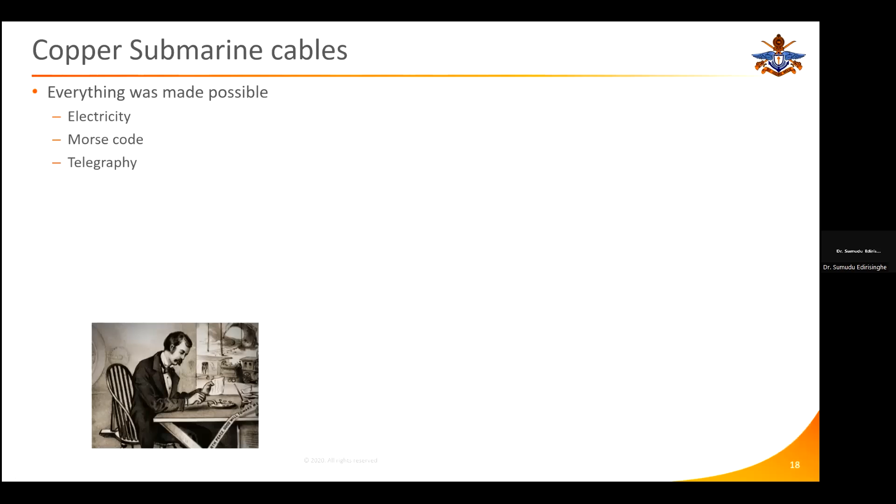One of them was electricity, and also at the same time, the invention of Morse code, and then driven through that, telegraphy. So those three main events happened in the 1800s that made a big jump or made a big push for the next chapter of telecommunications.

And by that time, another thing has happened in the world. Most people have taken to ships and started discovering various continents and countries around the world. So because of these two things, mankind was spread around the globe, and they wanted to get information from one place to another place that required crossing the sea in one way or another.

And of course, at that time, people haven't invented the aeroplane. So any message that needs to be sent from one continent to another continent had to happen through a ship. So a ship would take between 6 to 8 weeks to go from UK to USA and vice versa. So a message would take at least 3 to 6 weeks from one place to another place, depending on the sea conditions, the winds, and so on.

So once we have invented electricity and Morse code, there was a significant drive to have some kind of electrical cable to communicate between countries that are separated by sea. So this idea was floated very early in the 1800s, and by 1851, the first submarine cable was initiated, and that was laid between UK and France, which is only about 20-30 kilometers.

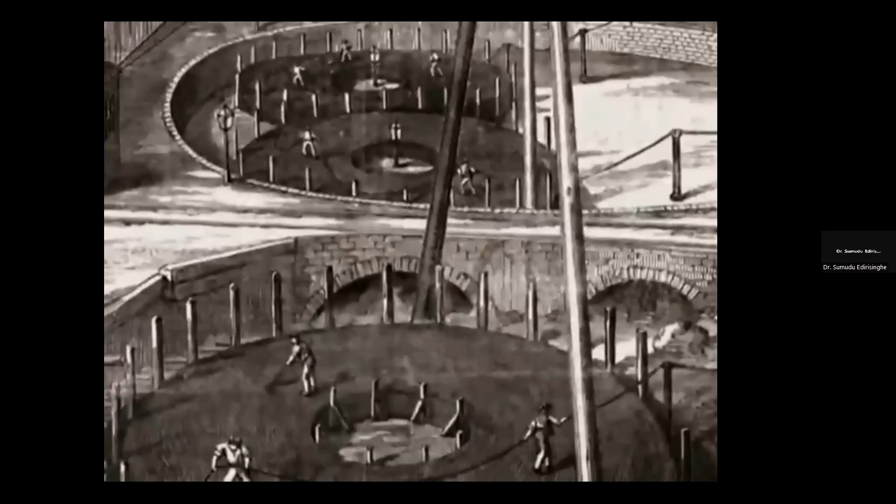By the 1840s, a network of telegraph poles connected nearly every American city. And by 1861, a telegraph line reached from New York to San Francisco. But messages between America and Europe still had to be sent the old-fashioned way, on sailing ships that could take weeks to cross the Atlantic Ocean. And the idea occurred to somebody to build a telegraph line across the Atlantic Ocean. The transatlantic cable would be the greatest engineering feat of the 19th century, but the idea for it came from an unlikely source. Cyrus Field, a savvy New York businessman looking for something to do. He knew nothing. He was in the paper business. He knew nothing about telegraphy. But he suddenly had this idea we could put a line across the Atlantic Ocean, which is about 100 times longer than the undersea cable in the world at that time. He was a very determined man. He was not easily discouraged. Field spent 12 years raising money for the project, crossing the Atlantic more than 30 times to seek investors in England and Europe. He was the right man for what would prove to be a daunting task. First, over 2,000 nautical miles of cable had to be built. The cable consisted of 7 strands of copper wire insulated in gutta-percha, and it weighed over 1 ton per mile. Then, the cable would have to be unspooled yard by yard across the Atlantic Ocean, from Ireland to Newfoundland in Canada. But at the time, there was no ship in the world that could carry the heavy load of insulated copper wire. So 2 Navy ships, one American, one British, would each carry half of the cable.

The ships set off together from Ireland on August 5, 1857. But disaster struck 6 days later as the American ship was hit by a wave and the cable snapped. There wasn't enough cable to continue, so the project had to wait another year.

For the second attempt, new cable was manufactured, and it was decided that the 2 ships would meet in the middle of the ocean, splice their 2 halves of the cable together, and then go off in opposite directions, laying cable as they went. This time, the cable on the British ship snapped, and the mission had to be abandoned once again.

On the third try, both ships reached their destinations on opposite sides of the ocean with the cable intact. On August 16, 1858, Queen Victoria sent a telegram of congratulation to President Buchanan through the line. But a few weeks later, the signal on the cable gave out. Still, Cyrus Field would not give up.

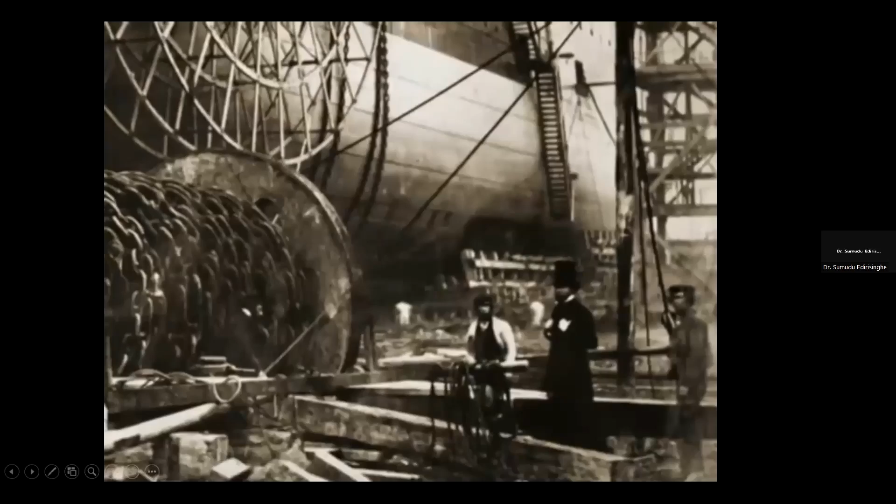It took them 5 tries. He first had the idea in 1854. It was 1866 before they succeeded. The Civil War came and went, and Field worked even harder, raising more money for a new, heavier, and better insulated cable. By July of 1865, there was finally one single ship that could carry it, the largest ship in the world, the Great Eastern.

But again, 600 miles from Newfoundland, the cable snapped while being repaired. Sailors spent nearly 2 weeks fishing for the cable that had sunk, but finally they had to give up. Still, Cyrus Field knew his new cable would hold out if they tried it one more time. A year later, the Great Eastern successfully laid it across the ocean.

So you can see how many times people attempted to make this journey. And the first cable that was laid in the 1850s, it said after the first message was sent from Queen Victoria to President Buchanan, the signal deteriorated. So what happened really was that first message took something like 20 hours to transmit, because they would transmit a symbol and it would get it wrong, and they might have to transmit it several times until it was correctly decoded at the far end.

So in order to improve this, the engineers thought the best way to improve the signal is by increasing the power of the signal, because this is how radio signals work, right? If you want to send a signal further, you transmit with a higher power in the transmitter. Unfortunately, cables don't work in the same way. So as soon as they increased the electricity, it burned the cable out and completely snapped it. So it completely destroyed the cable by trying to increase the signal power in this first submarine transatlantic cable.

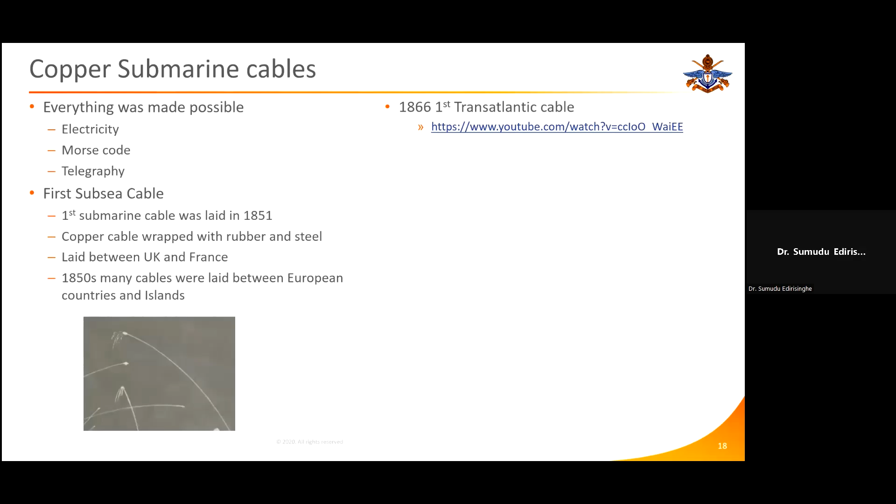But after these failed attempts, many tries later, they managed to eventually have a cable laid by 1866 with the use of the Great Eastern ship that was built by Isambard Kingdom Brunel. So by 1871, the use of undersea cables had spread from that transatlantic route to between Japan, Russia, China, Europe, and the Indian Ocean. So many countries were slowly getting connected using undersea cables.

And the first cable that actually carried a real live telephone call was made in 1891. Because remember, telephones were only invented around 1876 by Alexander Graham Bell. But until then, all they were doing with these cables laid under the sea was to send Morse code signals like a telegraph. So it would only be a short message sent from one end to the other end. So it took a long time, about 15 years since the invention of telephones, to be able to carry a telephone call on a cable that was laid under the sea.

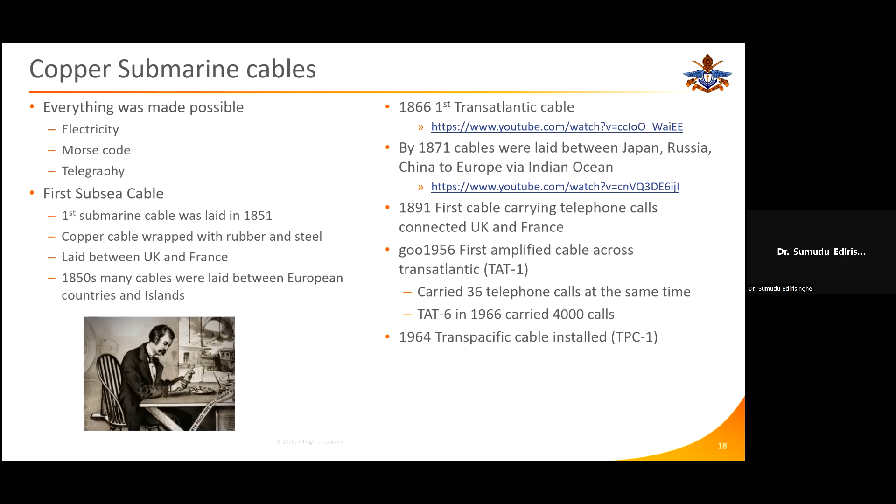So what are the main components of a submarine cable system? Submarine cable systems consist of some terminal equipment, which will be the equipment that converts your telephone calls into a series of zeros and ones. And we are talking about fiber optics. So those zeros and ones need to be converted to optical pulses, depending on whether it's a 0 or 1.

Then there is a cable that carries that information under the sea, which is a submarine cable. And sometimes these cables not only go to one country, they actually serve several countries. And increasingly, the new cables that are designed today, a single cable will connect probably 20, 30 countries at the same time. In the olden days, when we designed a submarine cable, it went from one point to another point. They were called point-to-point links. They were only predominantly connecting two countries together. So nowadays, we are connecting multiple countries together.

In addition to that, we also have amplifiers to amplify the signal under the sea. These cables, depending on the location where you're going to lay the cable, have different amounts of protection around them. And then all this network, including the units under the sea, has to be managed. Somebody has to stay there 24/7 to look after the health and react to any problems at any given time.

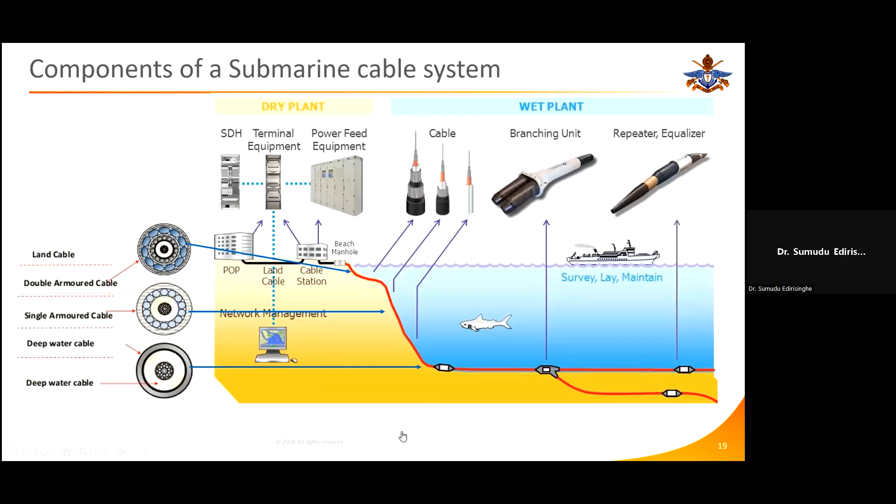So a submarine cable is usually made out of a few optical fibers. And optical fibers are the size of a hair. These optical fibers, usually on a submarine cable, we only have about 8 pairs. So that means 16 fibers.

One fiber will take data from A to B, and the other fiber will take from B to A. So to connect two countries, you always have to have two fibers. One doing transmission in one direction, the other one doing the transmission in the other direction. So optical fiber always comes in pairs, or two fibers together.

So the optical fibers are then set in a little petroleum jelly. It's like the jelly you make at home, but it's made out of petrol, so they don't freeze up in the cold weather. And that gives a little bit of a cushion for the optical fibers to sit in without getting damaged. Around that, we have a copper tube.

And that copper tube provides two activities for the cable. One of them is to protect the fragile fiber that is inside. Secondly, this copper tube carries the electricity that is required to power up the amplifiers that are under the sea. And beyond that, there is a polycarbonate structure and an aluminium water barrier. So this aluminium stops any water getting inside this cable.

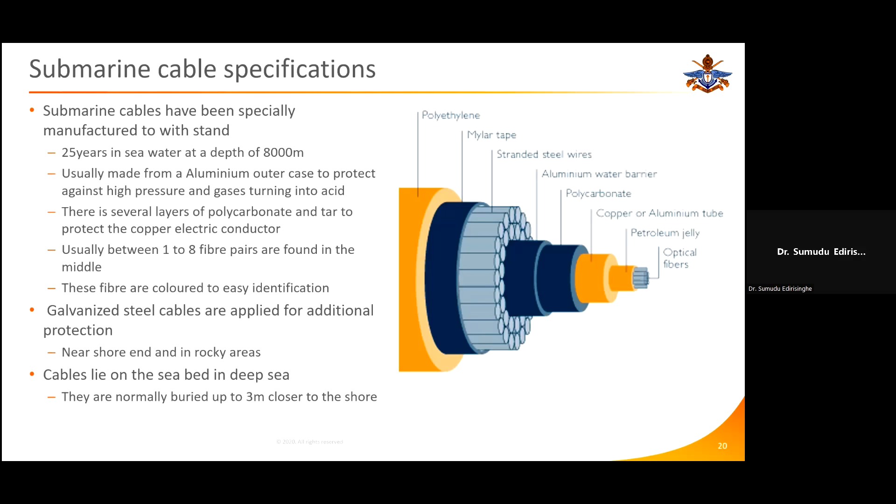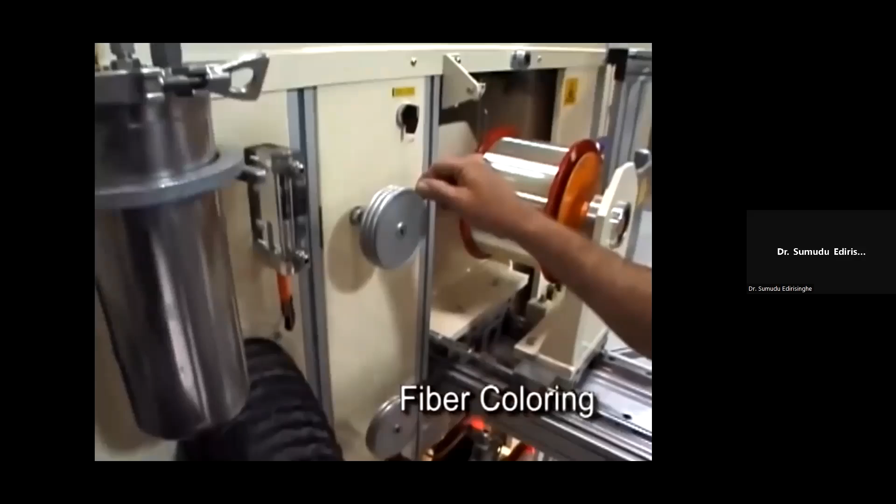In the UV inking process, a specialized ink is coated onto each optical fiber. One of 12 colors is used to properly identify the optical fiber within the tube or ribbon in accordance with industry standards. After the inking step, the optical fiber quickly passes to a curing enclosure that rapidly cures the ink to form a permanent color coating and then wound onto a take-up reel. The color-coated fiber is now ready to be put into loose tube or made into ribbon fiber.

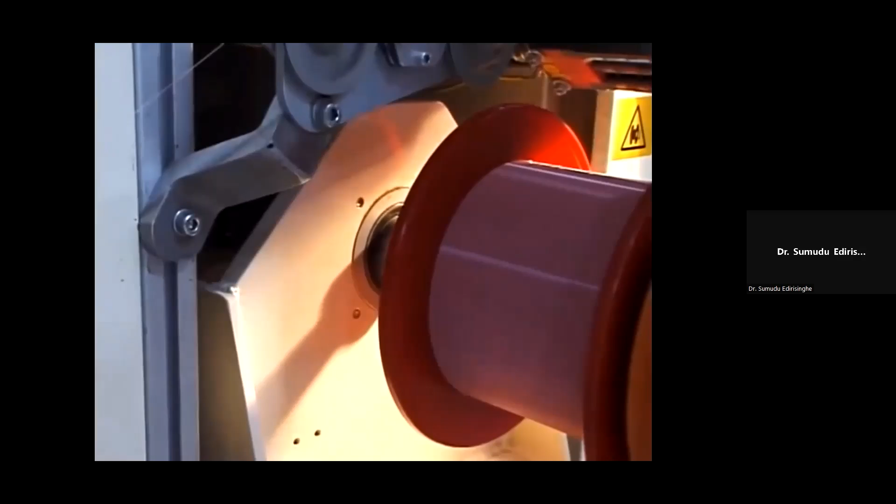For tight buffer cable products, a colored PVC coating is applied that increases the diameter of the fiber from 250 microns to 900 microns. This process is called tight buffering, which, in addition to providing a color to identify each fiber, allows the resulting cable to be flexible, yet rugged and easily mated to mechanical connectors. For these reasons, the tight buffered cable design is the preferred fiber cable design for indoor cable applications.

At this point, fibers destined for loose tube or tight buffered cable proceed to the sheathing or tubing process. Fibers destined for ribbon fiber cables must undergo an additional intermediate step called ribbonizing. Fiber ribbons are created by serving 12, 24, or 36 individual fibers side by side into a coating die that encapsulates the fibers with a UV curable matrix material into a fiber array. In a process similar to the inking process, the ribbon leaves the coating die and passes through an intense ultraviolet light source that cures the matrix and solidifies the ribbon. The completed fiber ribbon is then wound onto a supply reel.

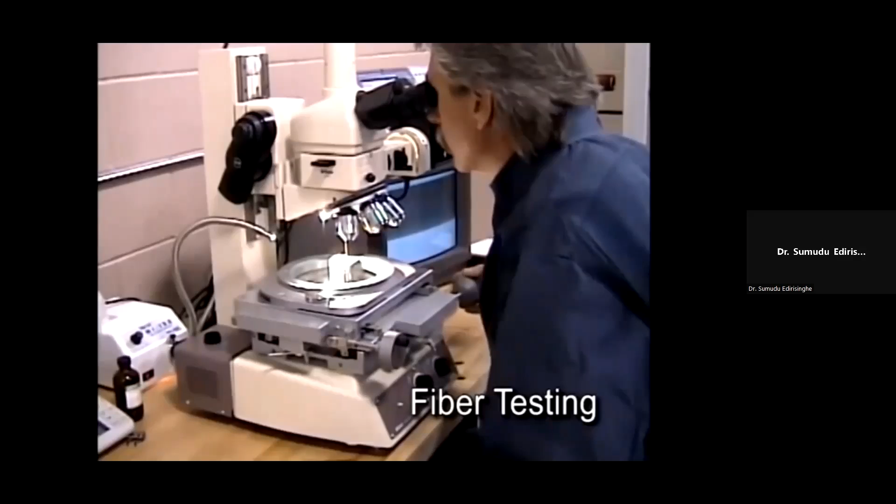Before the ribbon can be used in any cable, however, it must be tested to verify that its structure and dimensions meet specifications. A small length of ribbon is cut from the reel and placed under a microscope. A technician carefully examines the ribbon sample and fully documents the results. Only if the sample passes inspection can the reel go on to be used in a fiber optic cable. All three of the basic fiber cable designs, loose tube, ribbon fiber, and tight buffered cables, require some form of sheathing process. This is usually another intermediate step, but can be the final production step for small premises cable designs.

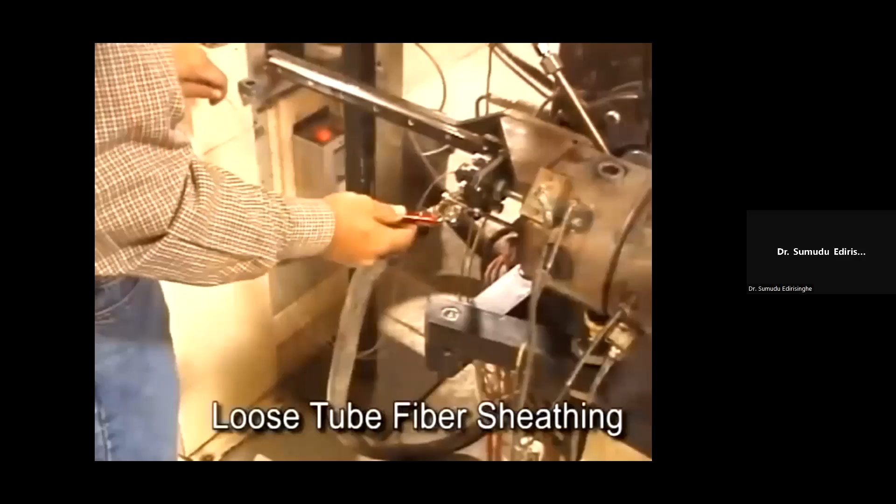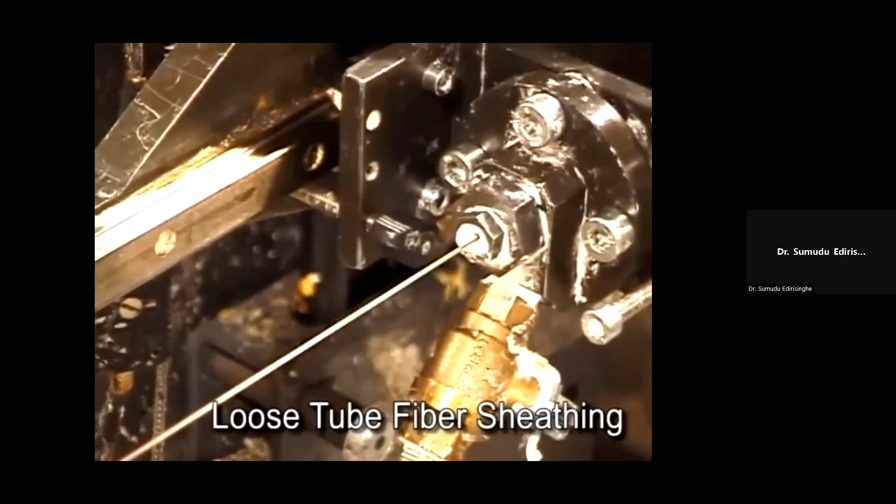Here we see a sheathing process for OSP fiber cable that begins with a number of reels of color-coded fiber loaded onto a machine that supplies each fiber at a constant rate under computer-controlled tension. The fibers come together and are fed into an extruder head that performs two main functions. First, a flow of moisture-blocking gel surrounds the fibers. Then, molten colored plastic is extruded around the fiber bundle to form a loose tube around the fibers. Immediately upon leaving the extruder, the hot, soft tube is passed through a long water-filled trough that slowly cools and hardens the tube. The completed tube is passed through an optical micrometer to verify its diameter is within specifications. It is then wound on a take-up reel to be used later in the cabling process.

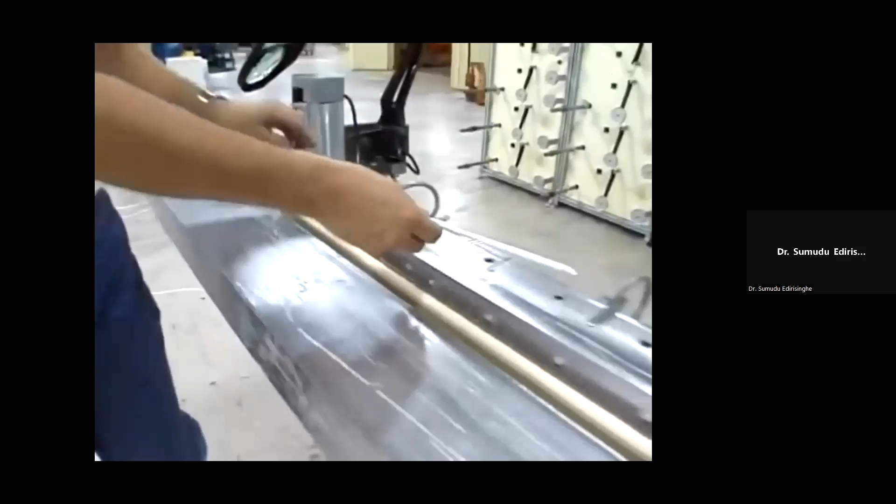As part of our quality control process, we periodically test fiber tubes to verify that there is sufficient slack fiber within the tubes. This additional fiber slack, also called excess fiber length, or EFL, allows the cable to expand and contract around the fibers without causing stress or attenuation problems. To perform this test, a section of a tube is placed on a special test fixture that accurately cuts it to a predetermined length. The tube is opened midway along its length and the fibers are removed. One of the fibers is separated from the bundle and is mounted between a pair of measurement blocks. A micrometer wheel is carefully adjusted to just bring the fiber into tension. A digital readout displays the fiber length, which is then compared to the known length of the tube.

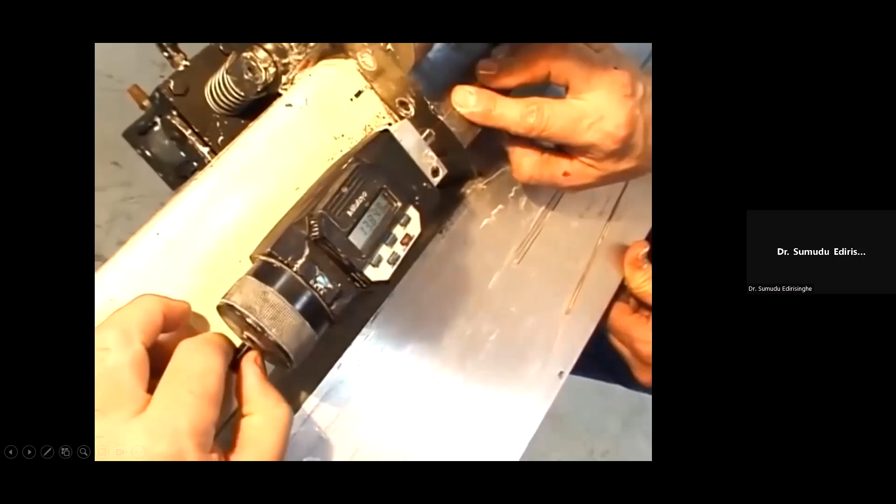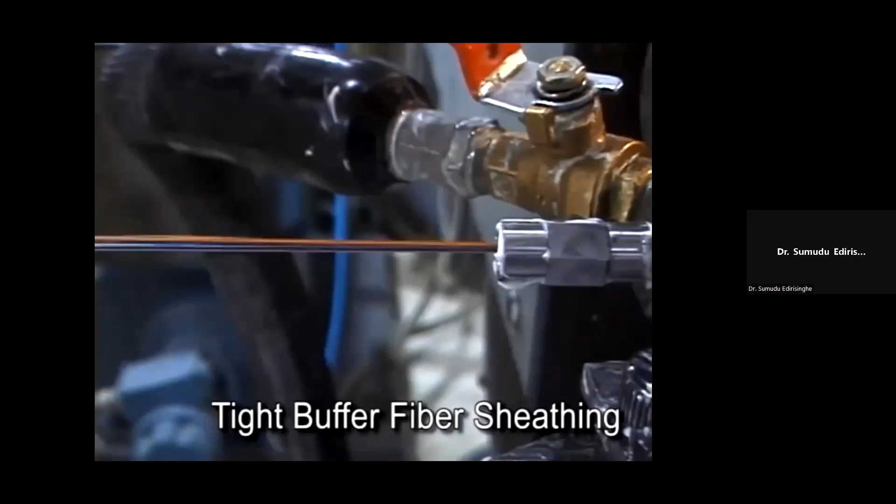In a different sheathing process, we see tight buffered fibers being fed into an extruder head along with special strength yarns. A fire retardant plastic material is extruded to form the protective tube around the fibers. In this case, the tube is also the outside protective jacket for the now completed cable. Ribbon fibers are handled in a similar manner during the sheathing process. 1 to 30 ribbons are oscillated in one direction prior to being fed into an extruder head, which forms the tube. This oscillation allows for a predetermined amount of fiber slack to be maintained within the tube.

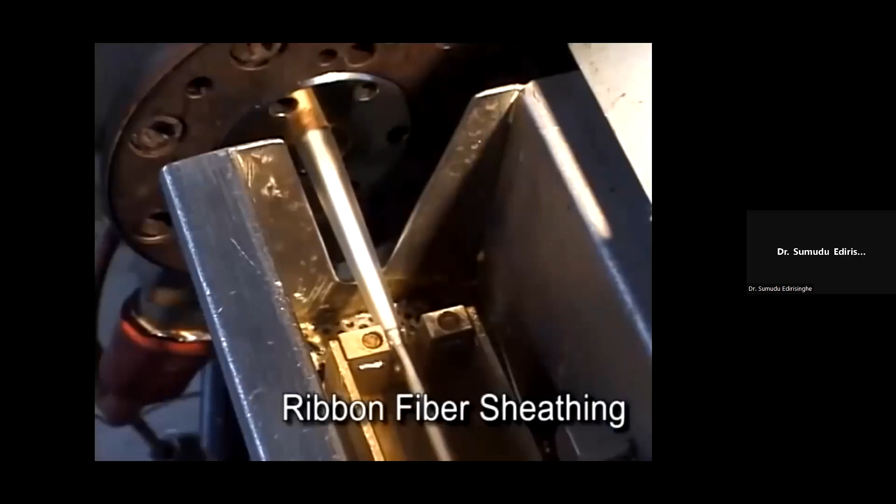PFM gel or dry water blocking agents are also inserted prior to the tube being formed around the ribbons. Depending on the number of fibers required, multiple tubes of fibers may be needed to create the desired cable. The process of combining multiple tubes is called stranding. Reels of fiber-filled tubes are loaded on the payoff equipment of the cabling line. In this example, we see the production of a loose tube stranded cable.

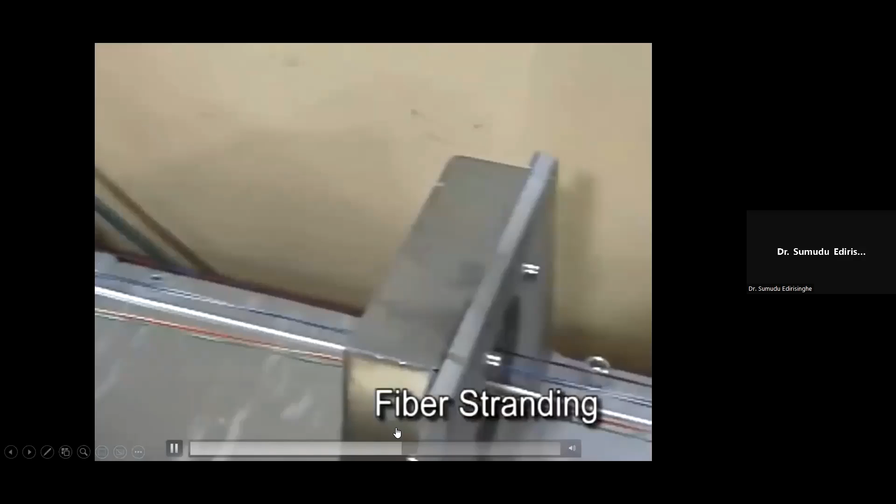The process begins with a reel of fiberglass rod that will become the cable's central strength member. Along with the fiberglass rod, a number of reels of colored loose tubes containing fibers are fed through a series of rollers and guides that straighten the tubes and position them in the correct relationship for the next step in the process. The strength member and tubes then pass into a machine that winds the tubes in a reverse oscillating wrap around the central strength member. Here, you can easily see how the wrap periodically reverses.

The cable is then covered with a layer of moisture-absorbing tape. This unjacketed cable subassembly can be used later as the inner layer of a multi-layer stranded cable, or be surrounded with steel armor for use in an underground cable, or simply be covered with an outer jacket for general-purpose applications. The final phase of fiber cable production is the jacketing process. The materials used for the outer cable jacket are chosen for the intended application of the fiber cable.

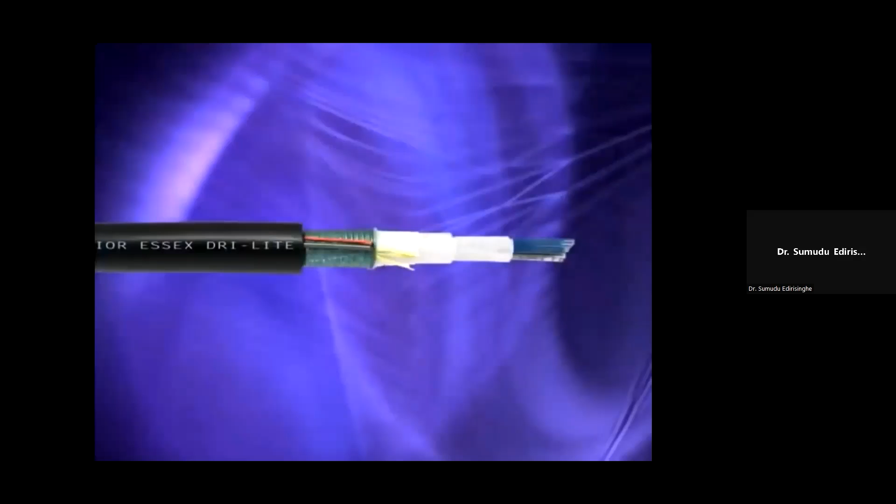For most OSP fiber cables, Superior Essex utilizes medium-density polyethylene due to its durability, moisture resistance, and low coefficient of friction. High or low-density polyethylene can also be used for select OSP cable designs that require different performance characteristics. Polyvinyl chloride, or PVC, is typically used for the jacket material in our premises cable designs. PVC is a thermoplastic with good flame and abrasion resistance, making it suitable for raceways, indoor-outdoor cable structures, ducted environments, and most riser-rated and plenum-rated locations.

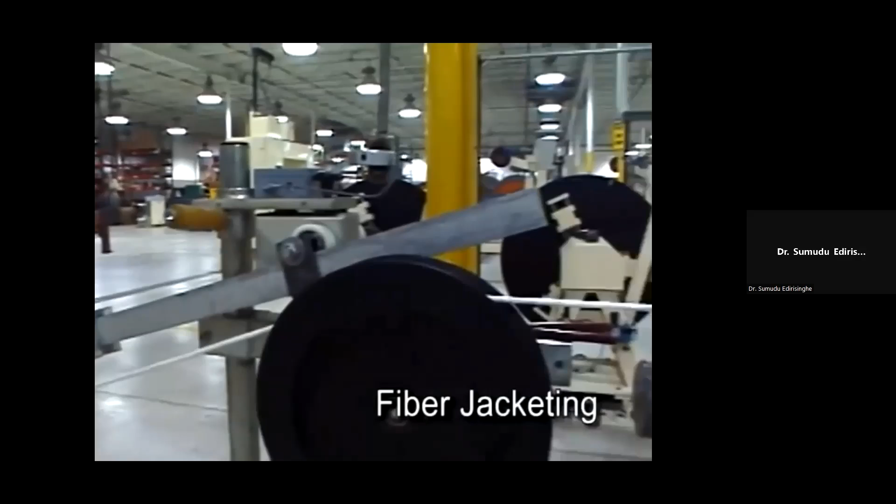The jacketing line begins with the reel of partially completed cable we saw manufactured earlier. This cable passes into a machine that spins a series of flexible fiberglass strength members in a web-like configuration around the cable. The web-like design avoids torque problems, which would cause the cable to have a preferential bend. In order to make it easier to access the cable core where the tubes and fibers are located, one or more high-strength ripcords are added. Here, the red ripcord is seen traveling parallel to the cable as it moves toward the jacket extruder.

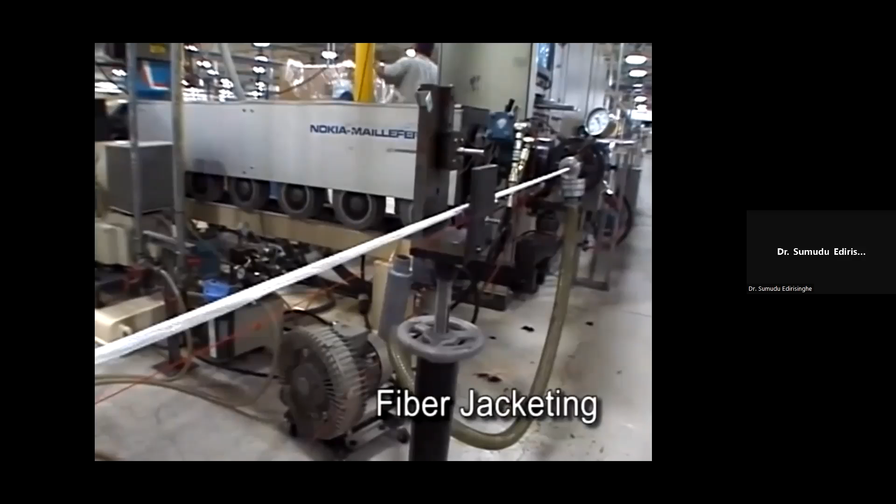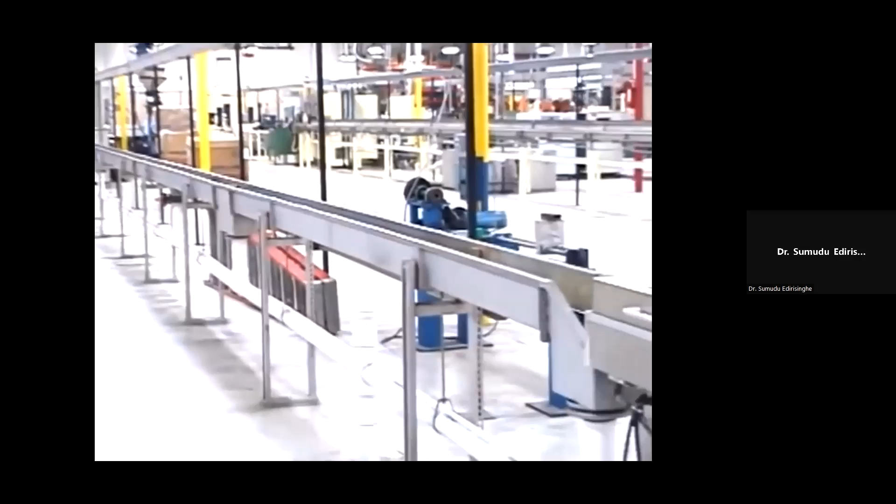The jacket extruder is simply a scaled-up version of the tube extruders we saw earlier. Molten jacket material is injected at high pressure and formed around the moving cable. When the cable leaves the extruder, it is very hot and quite soft, so it must pass through a long cooling bath while being kept straight to prevent the cable from developing a permanent curl. When the cable exits the cooling bath, it is passed through an optical micrometer to verify that its diameter is within specifications.

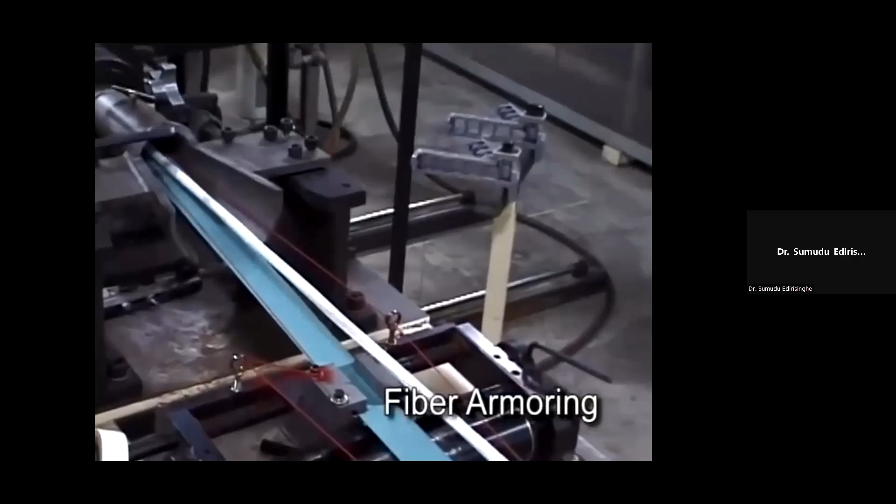Cables used in direct buried applications often require corrugated steel armoring to prevent rodent attack as well as damage from sharp rocks. The corrugated steel armor is formed from flat steel tape that is supplied on large reels. The cable, armor, and a ripcord are fed through a forming tool that wraps the armor around the internal cable elements. The newly armored cable now passes through an extruder where the outer jacket is applied to the cable.

After jacket extrusion and cooling, the cable passes to the jacket printer. Here, a hot foil printing process transfers white ink into permanently indented print, which includes cable type, fiber count, date of production, footage or meter markings, and other required information. The completed cable is then wound onto large reels for shipment to the customer. However, one critical step still remains.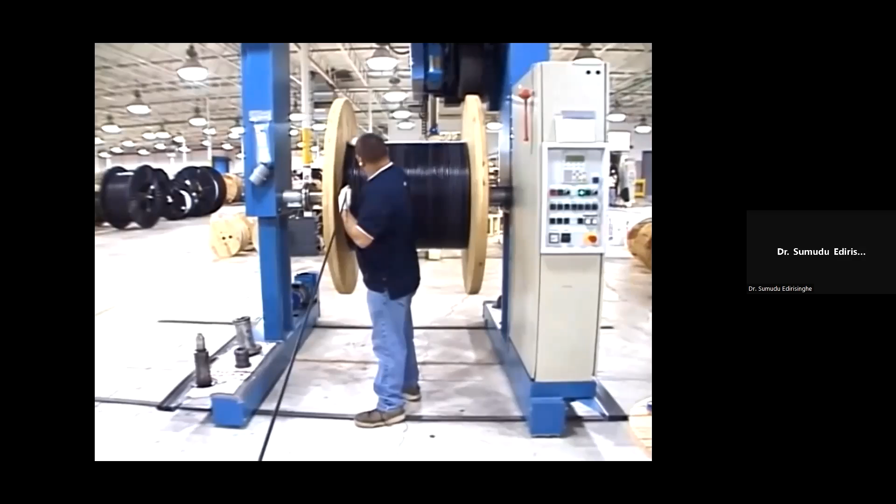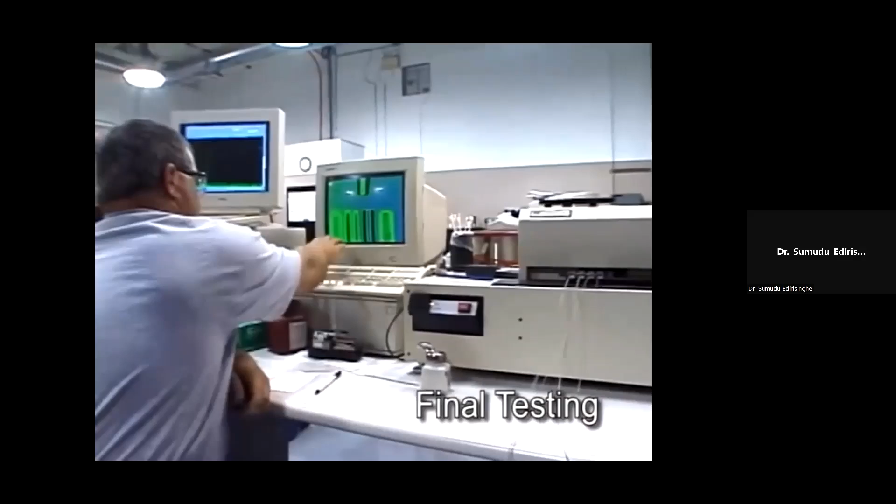The cable must go through our final test process to ensure that all fibers meet optical specifications established by Superior Essex. A short length of cable is prepared to expose the fibers to be tested. In this example, the technician is testing a ribbon fiber cable. All of the ribbons within the cable are prepared and inserted in test fixtures that are sequentially plugged into an automated test station. In this way, each fiber and every ribbon of the cable is quickly tested and compared against our specifications. Once the cable passes all tests, the cable...

Okay, I'm sorry that video has been pretty long, but you can see the various stages that have taken a few pieces of fiber optic cable, which are the size of your hair, into a cable that is going to sit under the sea for 25 years. One of the things I wanted to highlight was when they were winding the fiber, you could see them spinning the winding structure in one way for a few seconds and then in the reverse direction for a few seconds.

So by doing so, they can accommodate any expansions and compressions of the fiber cable due to heat. So some of these fiber will be sitting under the sea, which is normally a constant temperature at about 4 degrees centigrade. But the parts that are sticking out into the beach could go through different temperatures in different parts of the world and at different times of the year.

So if, for some reason, this is a cable used in the Middle East, during the summer in the Middle East it could be up to 50 degrees centigrade. Whereas in the winter, in some places like Siberia or Canada, it could be about minus 40 degrees centigrade. So depending on the temperature that the cable is going to suffer, the fiber optics and whatever's inside the cable can expand or contract. And this could create tension and break the fiber.

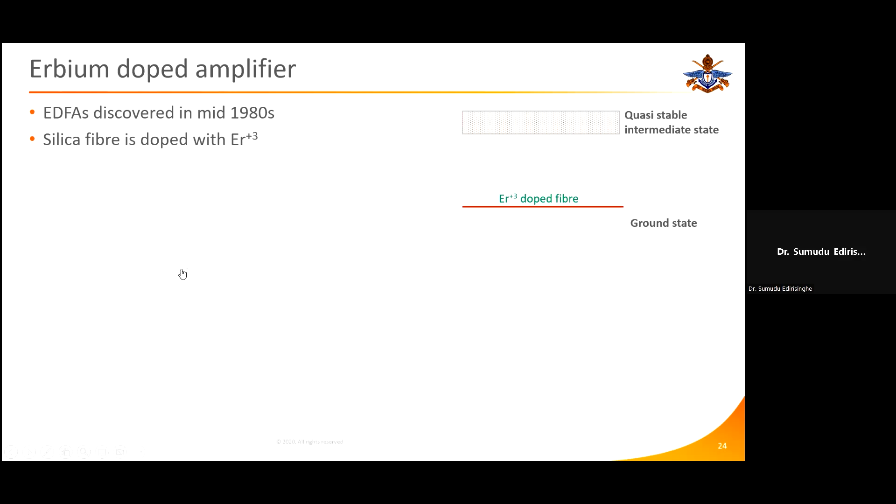So what they discovered was, if you take a piece of silicon dioxide fiber, I mean, fiber is made out of silica. If you take one of those silica fibers and put some erbium atoms inside this silica... In a school cricket match, right? All these people from either Ananda or Nalanda, whichever school you go to, watch the match. And after some time, you will meet your friends, have some alcohol, and you get into this quasi-excited state. So alcohol is like the 1480 nanometer light.

All these people who went to watch the match are these electrons that are staying in the ground state. Now, by lunchtime, because they have had a few drinks, they are all very excited. And what happens? A girlfriend from the rival school will walk across your tent or the boys' stand. You guys get excited and you start shouting at her or saying bad things. And she gets very excited. She goes and tells her friends, and this ends up in some kind of a row.

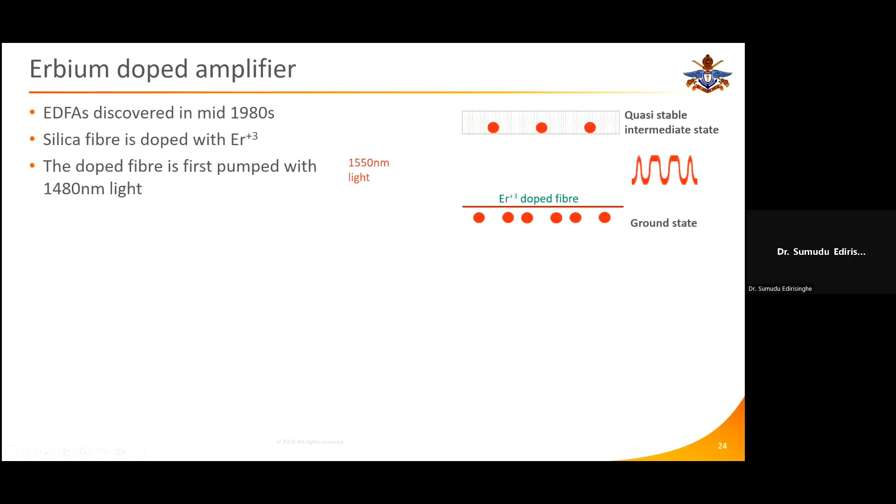So a very similar thing happens with electrons inside an erbium doped fiber. Once they get the energy from the 1480 nanometer light, they go to this excited state. As soon as 1550 nanometer light, which we send our data information through, passes, the energy starts transferring from these high energy electrons towards this light. The energy that is dropped when going from a high energy state to a low energy state is emitted as light or photons, and that is collected by this 1550 light to energize and amplify itself.

So this principle can also be created by using one of these structures. We use a small piece of erbium. We have a permanent laser energizing that erbium. And when 1.55 micron light goes through on one side, it gets amplified and comes out on the other side. Obviously, we need to do some filtering and get rid of unwanted noise, so we can have a very uniform gain across a wide range of frequencies.

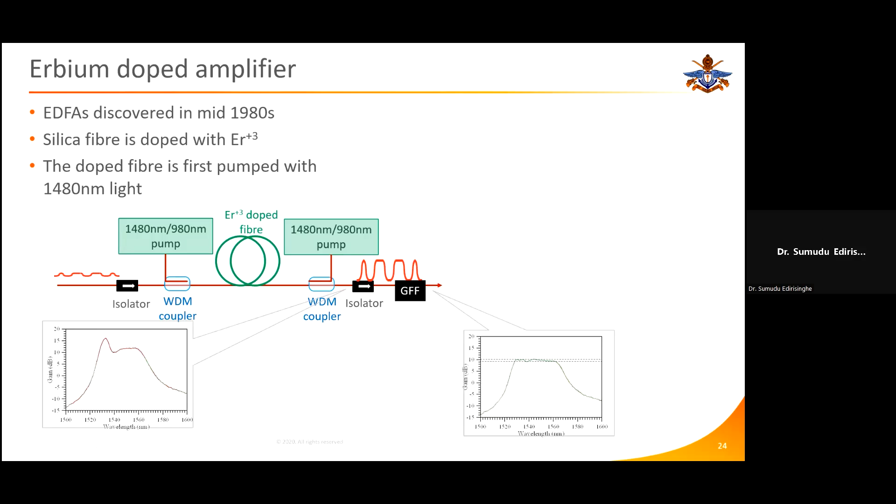I know this is very technical, but what I want you to get is that this new discovery allowed us to stop converting our data from optical to electricity and using electrical amplifiers to amplify it. Now we can use a pure optical amplifier. The signal goes through without being converted into electricity. So this technology then started to be used in optical fibers. In order to use this, we created optical repeaters, placed maybe between 40 to 120 kilometers apart.

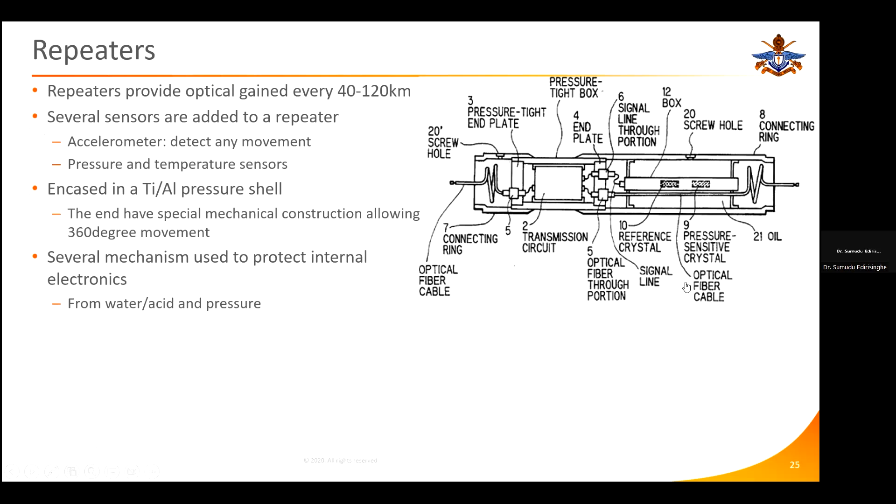If I open up that box, inside it has an electrical circuit to power the lasers. It has all the optical equipment required to house the erbium. It has special mechanisms to keep the water out. It has reinforced structures to protect it from the pressure of 8,000 meters of water. So many parts of engineering go into creating a repeater.

So any air bubble which is, I think, 100 microns or bigger needs to be eliminated. So we had to cut out the whole plastic sheathing and redo it until we were happy that there were no air bubbles inside it.

The equipment that goes in each repeater has to be very reliable. That means it has to have less than 100 FIT. A FIT is the number of failures within 10 to the 9 hours. So any repeater can only have a FIT rate less than 100. That means, again, an incredibly high level of component selection and superior engineering needs to go into creating one.

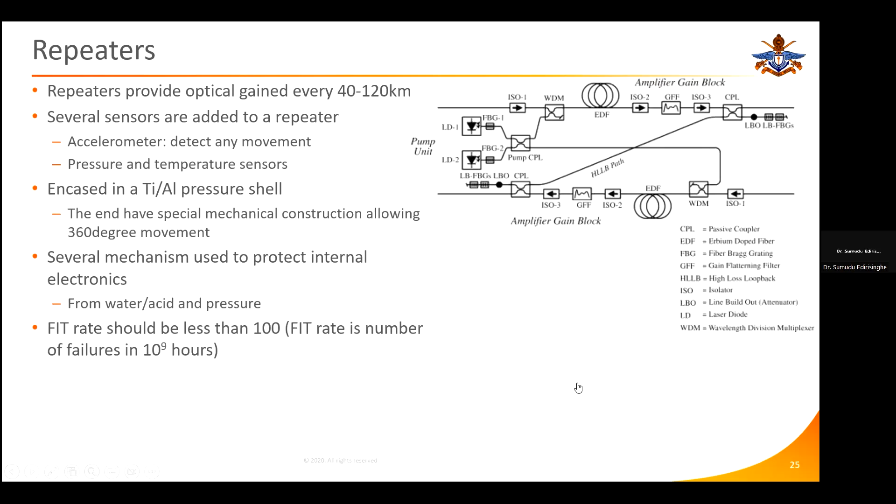And we also make these repeaters very reliable. So if one of these laser diodes has an accident, if that dies, we still need this amplifier to work. So in order to do that, we come up with some kind of redundant structure. If one of them has a fault, the other one can go to double the power and provide the same amplification. So there are very important redundancies inbuilt in these repeaters.

So here's one, we have two lasers. The laser is split between two amplifiers. So if one of the lasers has a problem, the other laser can go to double the power. Today, the new amplifiers that are designed are designed with multiple lasers. So if one has a problem, then another one can take over. If two of them have problems, the other two can take over. So a lot of additional electronics are put in just to make sure that this thing will last without any repairs for 25 years.

So optical cables with optical amplifiers were first put in real commercial deployments in 1996 in TAT-12, TAT-13. They were 5 gigabit systems. They had one channel working at 5 gigabits. Then Asia was connected through FEA in 1997. Most of these cables are still in operation. FEA is still in operation. TAT-12/13 was retired a few years ago.

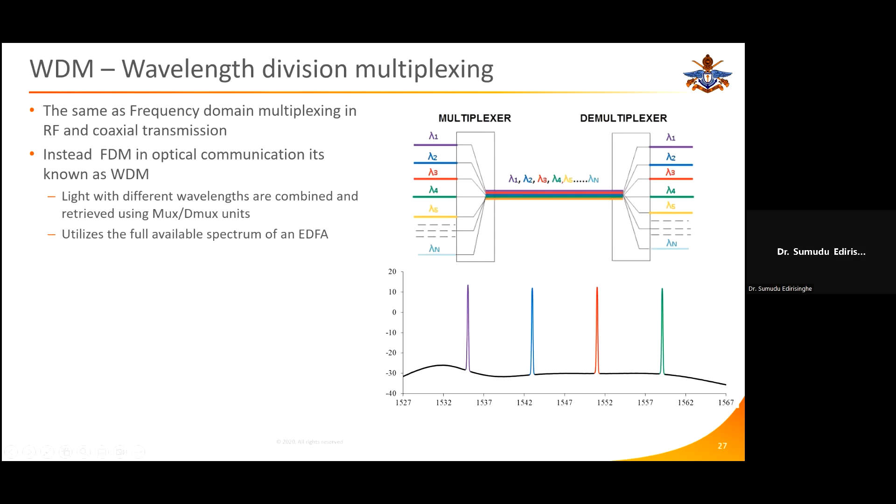So in a multiplexer, we will have different customers, each with a different wavelength going through an optical fiber. And on the other side, we can split out the different wavelengths to the original components. And they found out that there is very little mixing or very little information being transferred between each other. So we can easily keep the integrity of the data, even though they go in the same fiber.

So this type of WDM cable was first laid in 1999. Sri Lanka was one of the beneficiaries, from SEA-ME-WE 3. It was designed to operate 8 channels at 2.5 gigabits. Then there was China-US, again 8 channels at 2.5 gigabits. Japan-US. So now they started to increase the amount of capacity in one wavelength and the number of wavelengths.

So these improvements kept going on. I'm not going to tell you what we're doing today. I'll get to that in a later slide. But with this level of increments, by 2010, we were on 96 wavelengths, each working at 20 or 40 gigabits per second. So a huge amount of improvement was happening with time.

So all these links were point-to-point, they would go from one country to another country, except for SEA-ME-WE 3. Sri Lanka was getting a little bit of a spur. So this actually was going from Mumbai to Singapore, and we were getting a little branch. So slowly, the idea of creating branches started to happen as well.

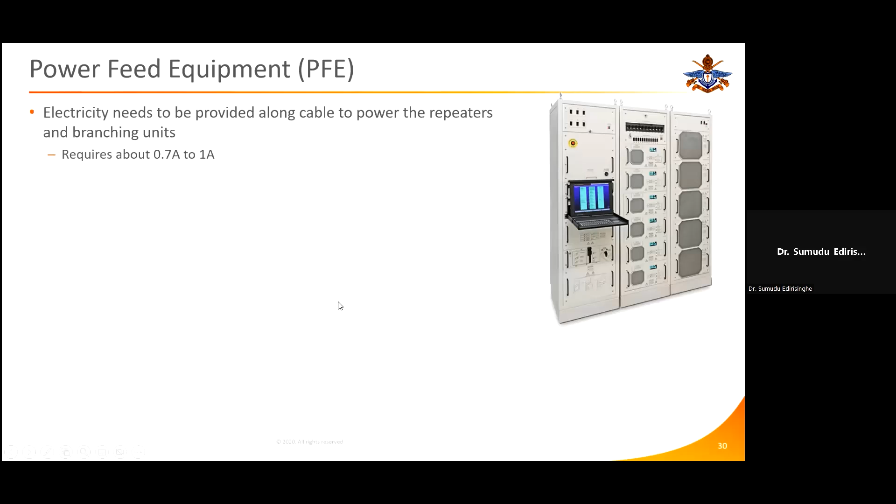The other part of the equation is we need to provide electricity through the copper tube to power up these units. So these are done through special electrical units called power feed equipment. Again, these are redundant. If one of the power generators fails, another one should take over automatically. These can provide up to 7,500 volts in each end. And about 1 ampere of current is sent down the cable.

So each repeater takes about 45 volts, each branching unit about 26 volts, and each kilometer of the cable has a 0.7 volt drop. So we have to calculate all this, factor all that in when we are designing a power feed requirement for these applications.

So it is very important that if ever you go into a cable landing station, and I know some of you have been to Matara, these have a big button saying do not switch off. But if somebody accidentally switches off the PFE, it will damage the cable. So if somebody presses this button by accident, there are large capacitors inside them. It will slowly drop the power.

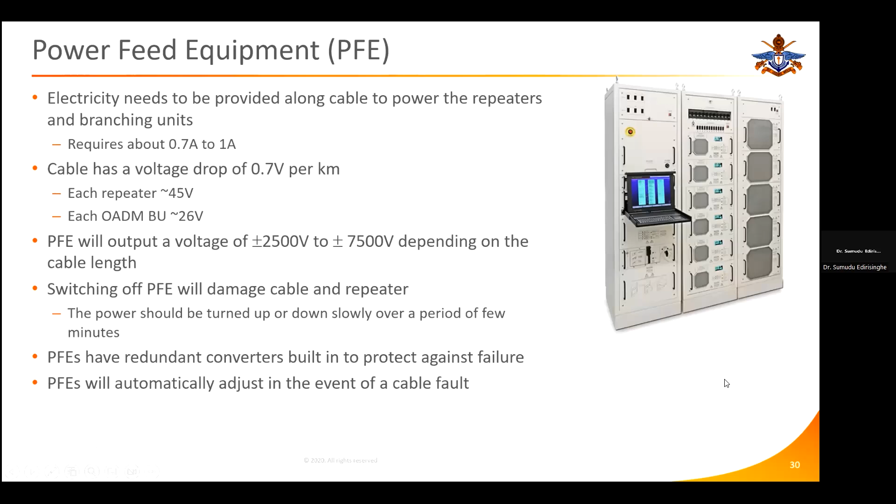These cables come into land in some location, and in those locations we keep this PFE equipment. So in Sri Lanka, we have a cable landing station in Brownshill in Matara. We have the Dialog cable landing station in Mount Lavinia. We have the SEA-ME-WE SLT station in Mount Lavinia, and we have another station in the Colombo SLT headquarters. So all of these are cable landing stations.

Cable landing stations do two important parts. One of them is to provide the electricity and provide a demarcation point for the submarine cable. Once data comes in from a submarine cable, it needs to be distributed to a terrestrial cable.

So fiber optic cable systems that operate inside a country have a slightly different operational mechanism to the fiber optic cables that are under the sea. But it is like your main post office, or it is like the harbor. When we get goods into the Colombo harbor, it comes in containers.

But if you order a TV from Amazon or Alibaba, it doesn't come in a container to your house. What comes into your house is a small box. So in the harbor, the container needs to be opened, the small boxes need to be taken out, and then they need to be distributed to the right location within the country.

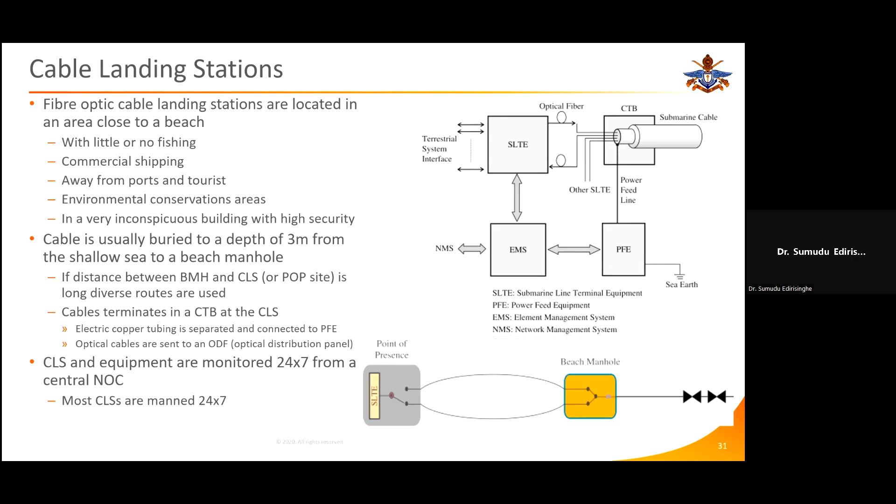So I come to the last few slides for today. I talked about the cable, the repeaters, how we provide electricity, how we provide branches, the main technologies that we are using. So how do we actually lay a cable? How do we decide where to put a cable? What process do we undergo? The next few slides contain a few videos, and hopefully you can bear with them. It shows you how this is done.

So first, nowadays, most of the cables are planned as consortiums. That means not two countries, not private owners. A few countries come together, sit down around a table, and each one says, I need to have 10 terabits of data from the UK. Let's say the chairman of Sri Lanka Telecom sits down in this meeting and says, most of my traffic comes from Singapore, India, Dubai and London, so I want this amount of capacity on this cable.

So a few countries come together, they put all their demands on the table, and then they combine a technical team who will take that information and convert it into what kind of cable and data requirements they have. And then each of these parties will say, okay, I will allocate X amount of money for this project.

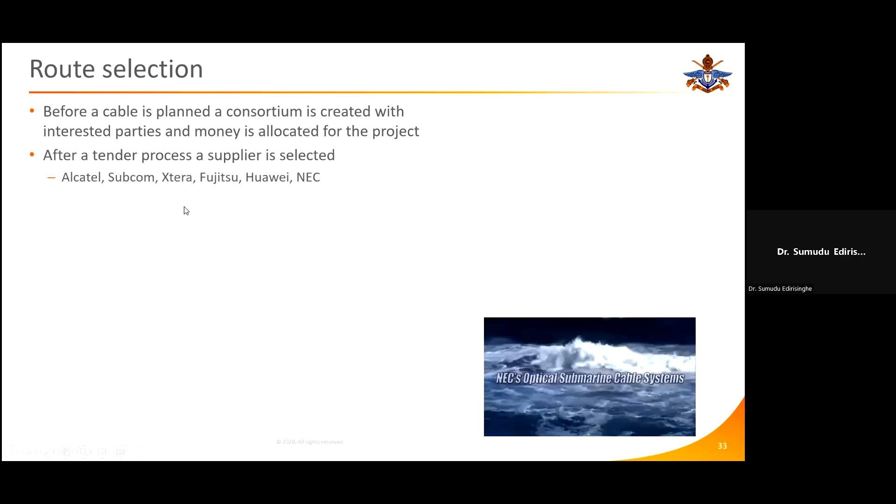After that, this will go through a tender process. Today in the world, there are only about 6 suppliers who can supply for this. One of them is Alcatel. TE SubCom is the biggest manufacturer. There's Fujitsu, NEC, Xtera is a very small participant, and Huawei is another upcoming participant in this field. So they are the only suppliers in the world at this point of time.

So first, they will go and ask these companies to plan a route.

So before I come to that, I'll run this video so I can get some water as well.

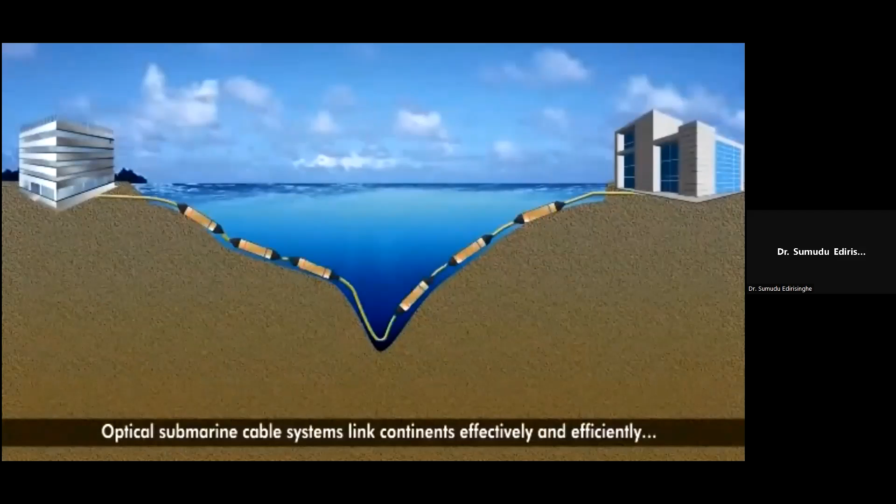Optical submarine cable systems link continents effectively and efficiently. These systems can withstand water pressure down to 8,000 meters and transmit over distances in excess of 10,000 kilometers. Optical submarine cables, with their huge communications capacity and low latency, have overtaken communication satellites as the transmission system of choice. They now carry 99% of international communication traffic.

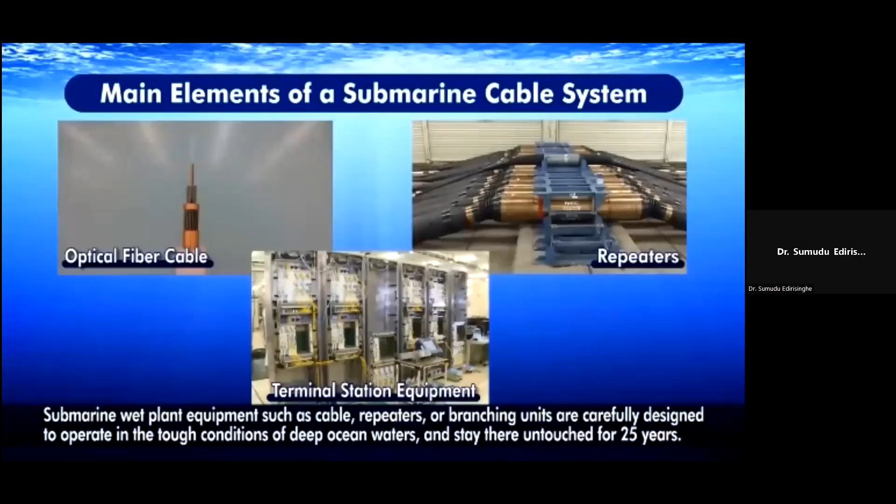Submarine wet plant equipment, such as cable, repeaters, or branching units, are carefully designed to operate in the tough conditions of deep ocean waters and stay there untouched for 25 years. A single submarine cable can contain up to 8 fiber pairs. When building a submarine cable system to provide ultra-fast, ultra-reliable global capacity, it is essential to offer well-proven designs for the optical fiber cable. In deep water, the cable is coated with minimal protection. In shallow water, the cable is overlaid with armor wires. This important device protects the cable from external aggression, such as seabed exploration and fishing.

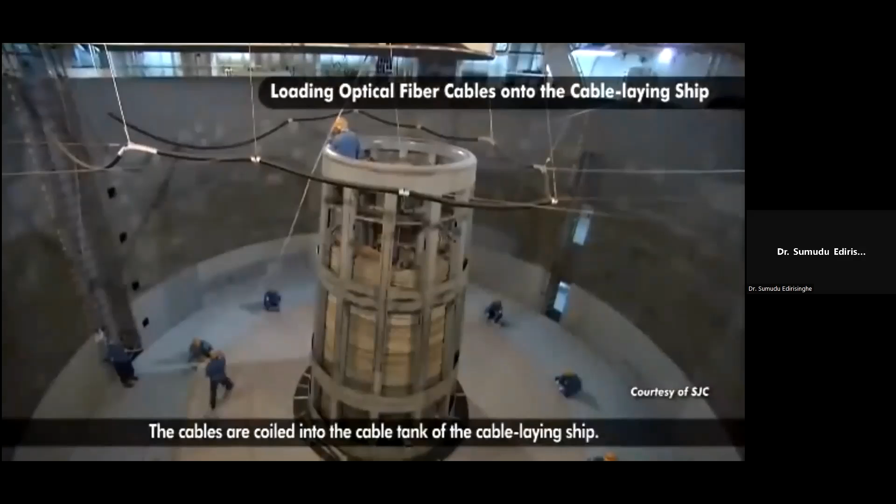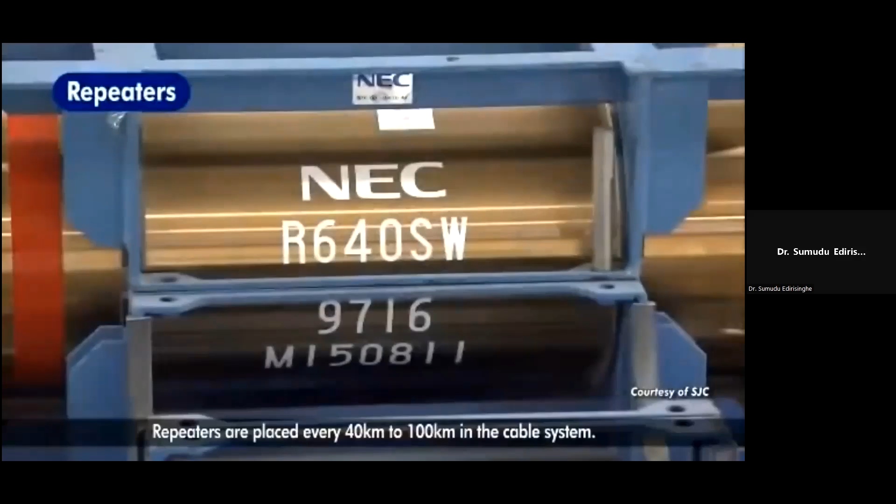The cables are coiled into the cable tank of the cable-laying ship. The desktop study is the first report to visualize the cable system that the customer will own in the near future. Based on the desktop study, we will carry out the route survey. Cable and repeaters are manufactured based on the cable route survey information. Repeaters are placed every 40 to 100 kilometers in the cable system. It is imperative that these repeaters keep operating smoothly over a long period of time in cold, deep water. The repeaters have their own exclusive loading space on the cable-laying ship. The cable ship will transit to wherever the cable will be deployed, and then she will start her operations.

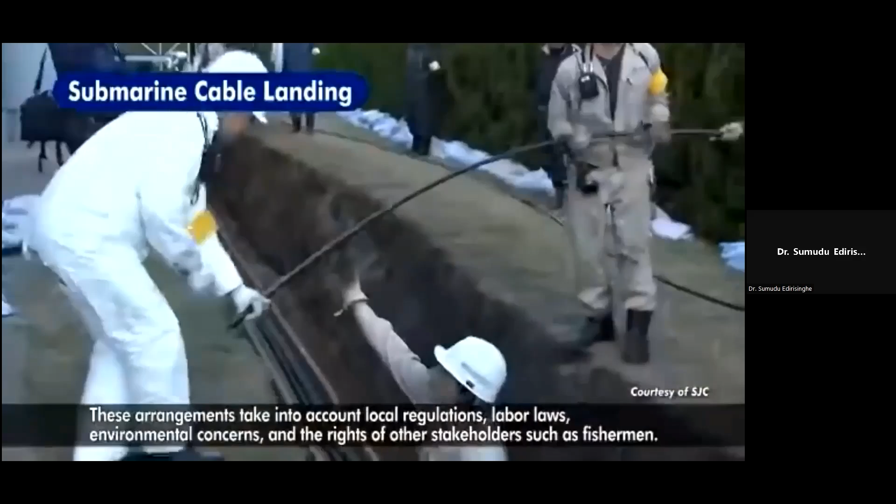Cable landing involves securing the submarine cables on land and linking them to the land-based facilities in the landing stations. NEC can arrange all the necessary permits to land the cable in each country connected by the system. These arrangements take into account local regulations, labour laws, environmental concerns, and the rights of other stakeholders, such as fishermen. The landed cables are attached to the terminal station equipment installed in the landing stations.

So just like Google Maps, nowadays when you want to go somewhere, Google Maps will show you exactly the road where we have to go. Most of the seabed has also been mapped over the years by various companies, and they own the rights for these maps. So whenever we need to design a cable, when we need to design a route, we have to go to these people and get a map. And from that map, we will do a desktop study and plan the cable route where it should go.

But of course, there are countries which have been in this game for a long time, like Singapore, Oman, Egypt. These countries have many cables that come into their countries. So because of that, we have certain rules about crossing other cables. So if you're laying a new cable, you are bound to go on top of an older cable that is currently in operation. So in order to protect the older cables, we have certain rules. We always have to make sure that no two cables will cross each other more than 3 times.

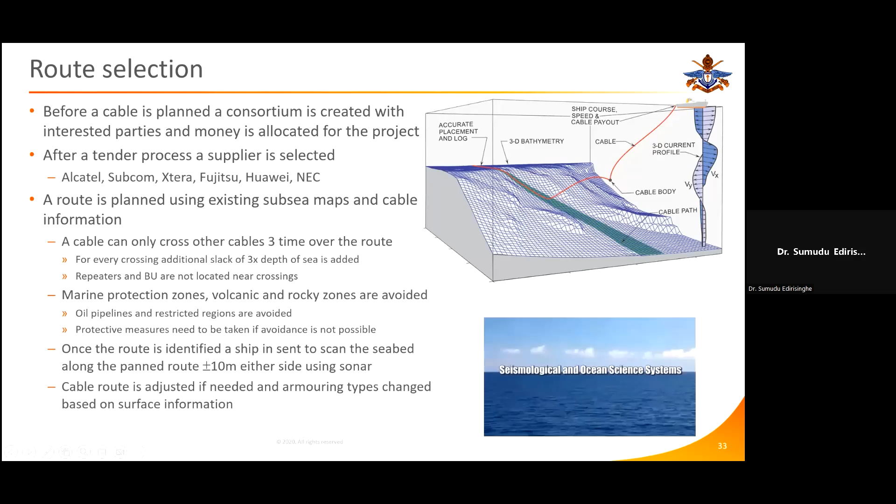So all this activity needs to happen, and from the point of coming to an agreement at a consortium table to the final cable being laid and operational can take between 5 to 6 years. Optical submarine. So once we have designed all that, we manufacture the full cable in the factory. The full cable is assembled with all the repeaters, and it's mounted on a ship.

So how do we get from there into laying the cable? So this entire cable is loaded into a ship. Maybe sometimes it is loaded into multiple ships, and then it is transported to the location where you have to lay the cable. Most of these cable manufacturers are either in New Jersey in the USA, in France, or in Norway. So in various parts of the world, and they have to transport that cable to the location where they have to lay it.

We start laying the cable from the middle of the sea to the ends. So let's say we are laying a cable from Sri Lanka to Singapore. They don't connect the Sri Lankan cable landing station on day one. They will start maybe 100 meters in the sea from Sri Lanka and start laying the cable all the way to Singapore. Only once that cable is laid do you connect the two ends to the land. We call the two ends the shore ends.

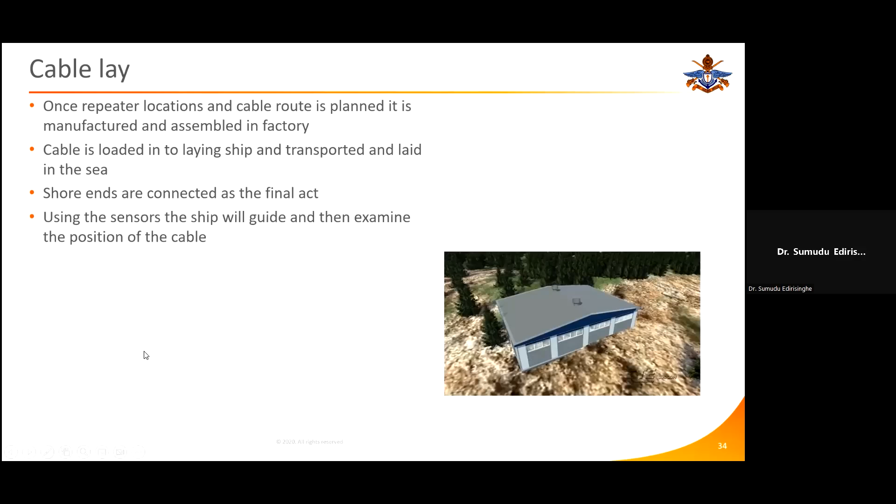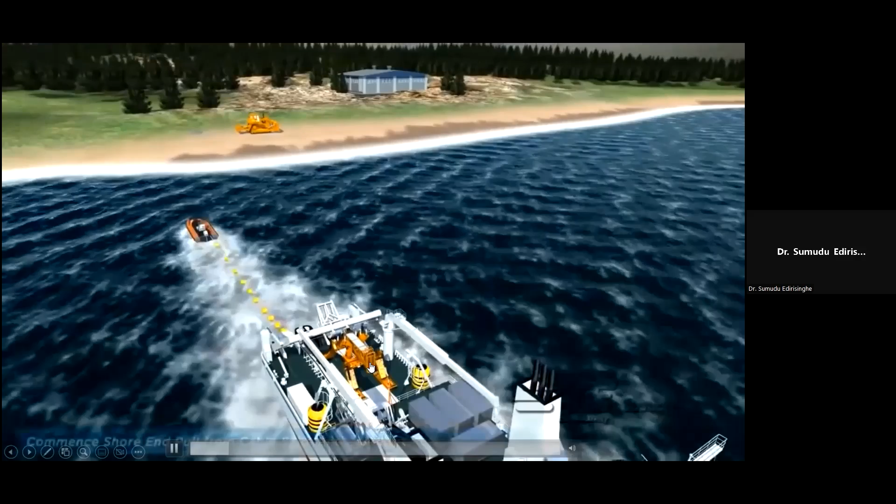And then there are an awful lot of sensors inside the ship and on the cable to help us position the cable. So there are many YouTube videos on this, but I'm just... the cable end. The cable has been... sorry, let me take the sound off this.

So this is the cable landing station, and the cable has been laid all the way in the sea, and now they're pulling it into the landing station. So what they do is they initially run trailer buoys, and this is the beach manhole, and they first run a rope and they pull the rope into the landing station. And then the ship goes on laying the rest of the cable along the sea.

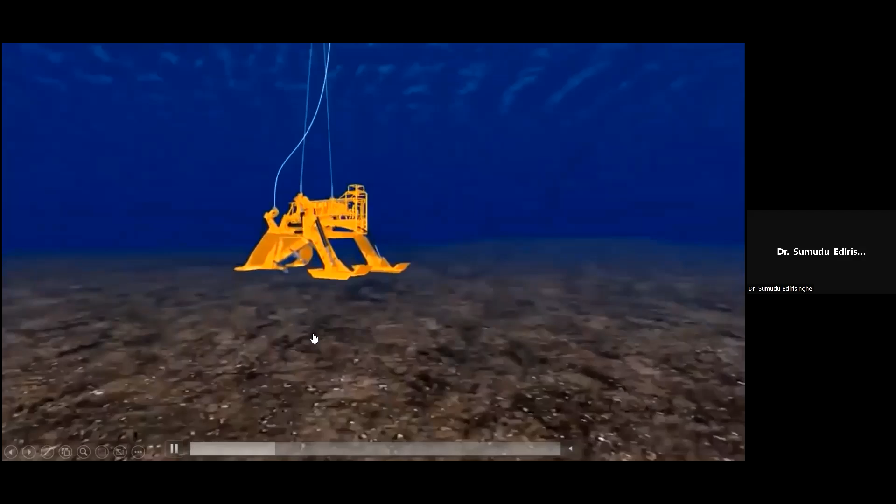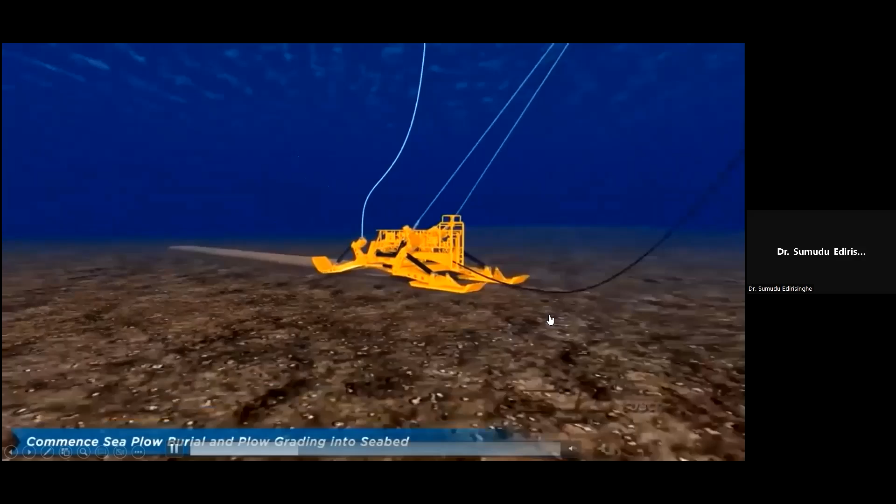So this one is called a sea plow. What it does is it uses water jets and creates a hole. And at the same time it's creating the hole, it starts to bury the cable. So it can bury it up to 3 meters based on the speed of the jet. This is called a sea plow. These are all operated remotely from the ship.

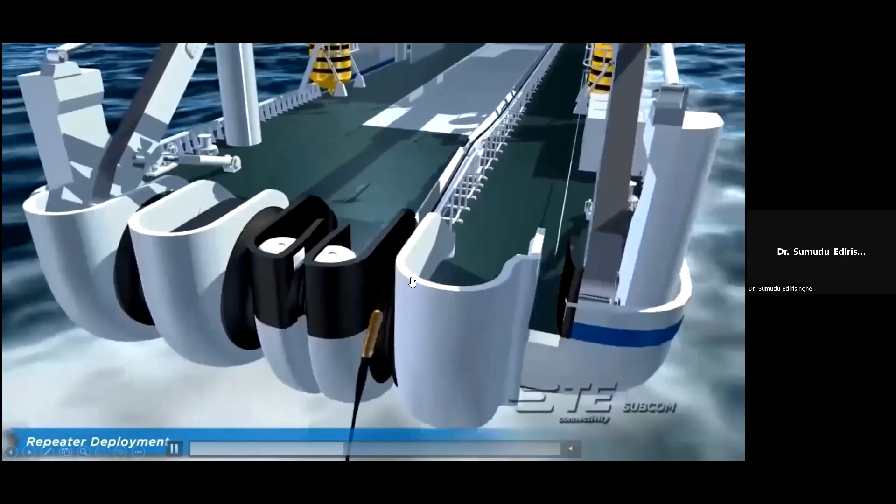We only bury the cable near the shore end, so only up to about 500-meter depth do we bury the cable. After that, we just lay the rest of the cable along the seabed as we go along. And if there is another, older cable, they don't actually plow on top of it. They just lay the additional cable and then start burying for the rest of the part. And once we have reached the deep water, we no longer bury the cable, we just start laying it along the seabed.

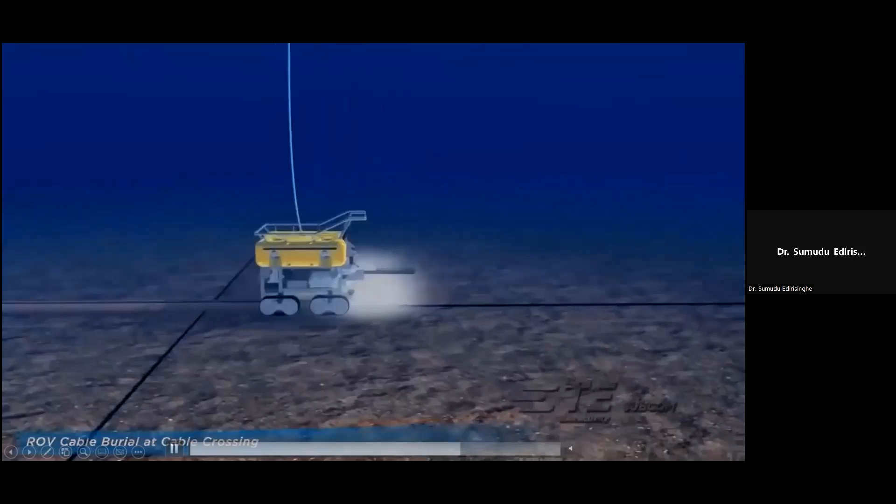And then again, we have a different kind of an ROV. This is between 500 meters to about 1 kilometer in depth. It can inspect the cable and see if it needs additional burial. So that's special, again, another special equipment. Again, in the deep sea, we actually don't bury it, we just leave it underneath.

So when the water depth is about 1 kilometer, we just leave the cable hanging on the sea floor, as you can see. If we have this type of rocky outcrops, what we do is we put down extra cable. So we make sure that the cable is resting on the seabed rather than hanging across ridges. So we'll always put extra cable to make sure that the cable is nice, sitting right on the seabed.

Okay, so this is the process we go through to lay the cable. And I'm coming to my last slide for today. So hopefully I can give a little bit of time back to you. So the last thing is what happened, how do we get faults? How do we do repairs?

So when we provide a cable, when we design a cable, each country is given a repeater and a spare amount of cable to be kept in a storage. Now in Sri Lanka, we used to keep it in Hambantota Port until we sold it to the Chinese. So now our cable storage area is in Galle.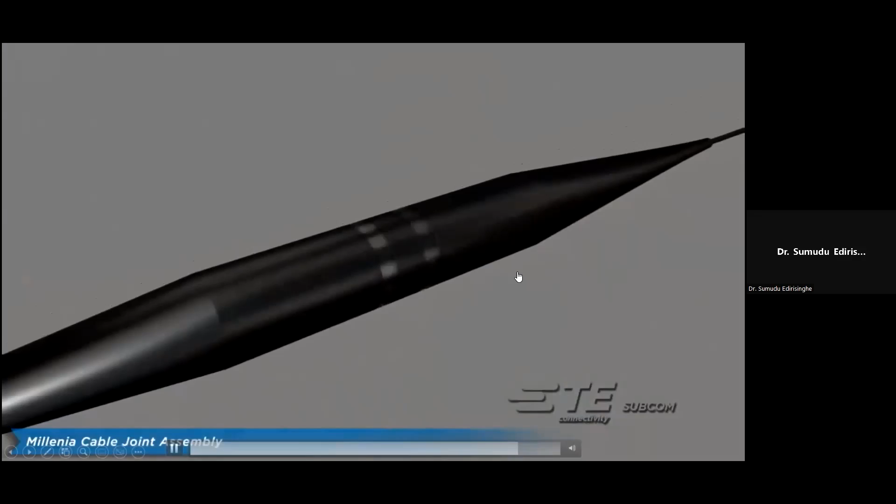And they will pull it back into the ship. Again, a new joint is done. A new protection section is added, X-rayed. Then the plastic cap is added. And then now the completed cable is slowly lowered back into the sea.

Now this process means we are adding additional cable. Every repair, we have to add at least 3 times the height of the water to the cable. So once the joint is done, it is lowered back into the sea and left on the seabed. So breaking a cable is a very, very difficult thing for us.

So I have been working on upgrading a cable between Malaysia and Egypt, and that cable was broken last week. So now we have a big problem. We have a race against time to have that cable repaired before the World Cup.

So there are 2 types of cable breaks. One of them is called shunt faults. A shunt fault is when the outer coating of the cable gets damaged, so the copper tube is exposed to the sea. The fiber optics that are inside the copper tube are not damaged. Usually these happen mainly from shark attacks and also from ship anchors damaging it.

And sometimes if the cable moves along the sea due to water currents, it could bruise against sharp edges and cut itself. A cable cut mostly happens from fishing nets. Now, usually cable cuts happen very close to the shorelines, except when there are underwater volcanoes or tsunamis.

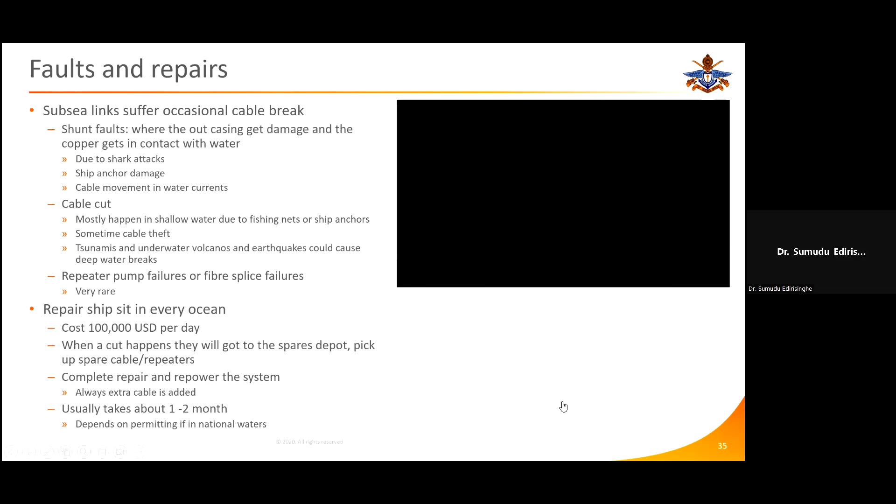So just to finish off, what is the history of cables in Sri Lanka? Obviously, we were first connected to the fiber optic world with SEA-ME-WE 3. The landing station is in Mount Lavinia. Then we connected to the Maldives with the Dhiraagu cable. It's again in the same station in Mount Lavinia in 2007.

SEA-ME-WE 5 came into Sri Lanka in 2017. This is the latest cable. This is the first time Sri Lanka is actually powering an optical cable. We are part of the bigger consortium, a bigger player in the world.

So that's really it for today. And I'm going to leave you with this video on the background of the SEA-ME-WE 5 cable being drawn into Sri Lanka.

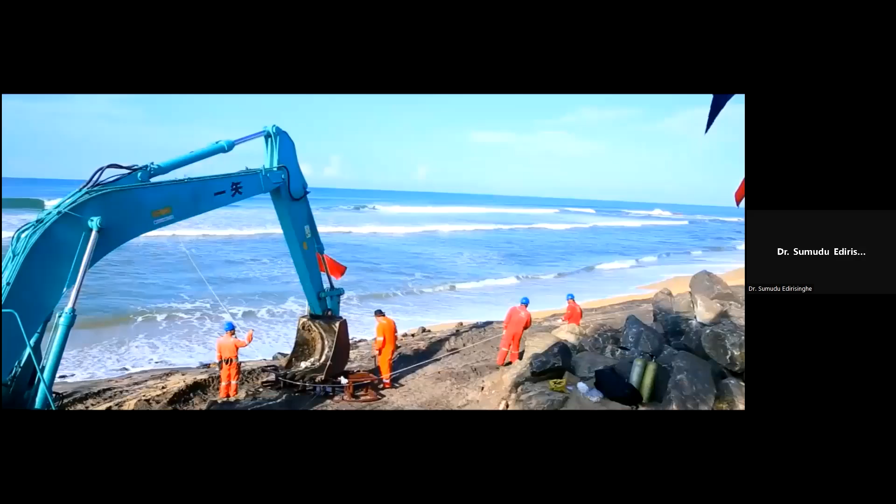Anybody from the south area will probably recognize the location. In the north of the beach, there is a statue where the cable actually comes from. The cable is slowly being pulled in, so the first bit of it being pulled in, and now the cable.

So the next one is, why do we need coloring of fiber optics? Now, if you have, let's say, 6, 7, 8 pairs of fiber inside an optical cable, how do we know which one is connecting to India? And if we are connecting half of them to India, half of them to Dubai, going from Sri Lanka, how do we know which one is connecting to Dubai? Which one is the transmit fiber and which one is the receive fiber?

So that's why we color the optical fibers, not the outside of the optical cable, with different colors. So you know the blue one starts from Sri Lanka, goes to India, and that is the transmit receive fiber. Receive in India, transmit in Sri Lanka. Maybe the red one is the transmit from India, received in Sri Lanka. So each end knows which color is connecting to where.

There's another question about what happens to cables when they're old. Really, this is a big problem. It's just like the satellites when they're old. What do we do with them? Nowadays, what we do is we actually pull the cables out from the sea, which we can. And some of them are being reused. For instance, the TAT-12, TAT-13 cable that went between the UK and USA.

I worked for a company called Xtera, where we pulled that cable out and then deployed it in countries which were not very rich, who couldn't afford a new cable, but this cable was satisfying their needs. So we took out the good repeaters, good amplifiers. We removed all the faulty amplifiers out of the system, and we laid it between the USA and Bermuda, Jamaica, Tortola, Bahamas, Dominican Republic, various Caribbean countries which were closer to each other. We laid that old cable, and that is in operation. We have given it a new lease of life for another 25 years.

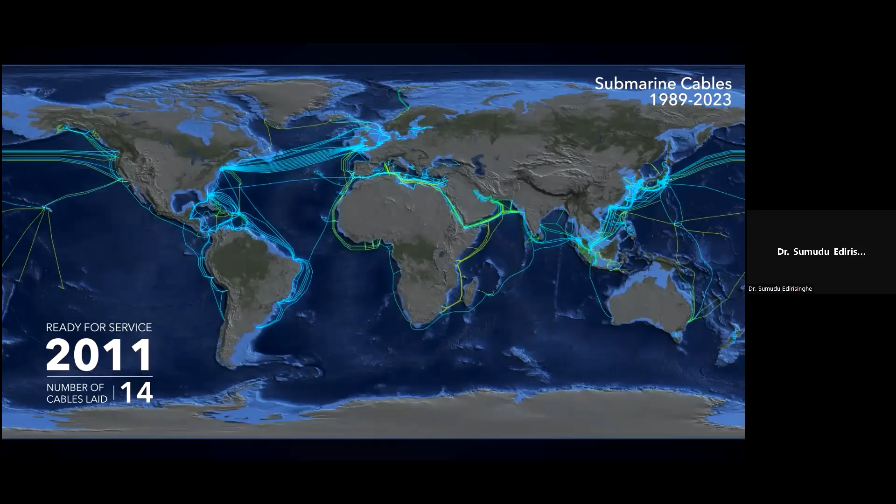Does temperature affect fiber optic communication? Yes, and so does lightning, so do water currents. Anything that has any disturbances will affect optical communication. But usually, because the majority of these cables sit under the sea at a constant temperature, because under the water, even under frozen ice, the water underneath is at 4 degrees centigrade. So that part is constant. Where we have a problem is when the cable comes out of the sea onto the land. In those locations, you could have temperature variations.

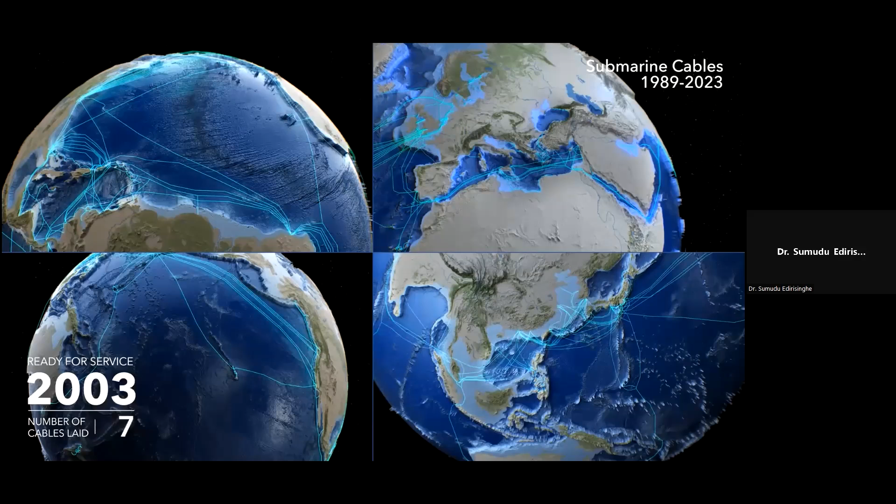Why are there many cables between some continents, but no cables between Australia and South America, for instance? That is not true.

And sometimes, again, it's a little bit about our relationships. Most of the people in South America are closer to people from Spain and Mexico and Portugal. So there are many cables between Portugal and Spain and South America. Another country that speaks Portuguese: Brazil speaks Portuguese, Portugal speaks Portuguese, and Angola speaks Portuguese. So there is a new cable between Brazil and Angola.

So just like we normally talk to our friends and relatives, the world also has that tendency. So they always try to stick to their friends, and similar speaking worlds try to stick to each other. So there are many cables between US, Japan, Hawaii, and Australia. There's many cables between Australia and Singapore.

But also, if we have some land in between, we can get more data going through that. So if you lay a cable from Australia to South Africa or Australia to Argentina, the distance of the cable is so long, it might be more productive to send the information via a shorter crossing to Hawaii, to US, and then back down.